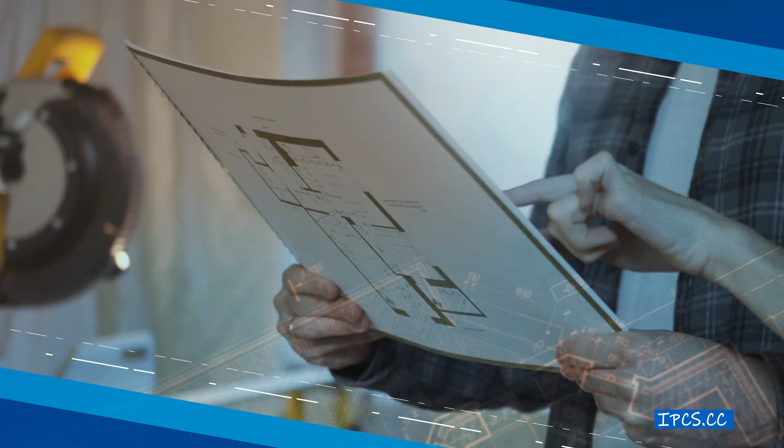We'll begin with an initial meeting here in our office or over the phone to discuss the project. During this meeting, an IPC Services representative will go over important details for your project. Are you looking for plans for a new home, an addition or alteration to your existing residence? Have you received a code citation for a change to your property? Will you need permitting assistance?

Aside from construction details, we'll also ask for your contact information, including your full name, phone number, and email address, as well as the site address and billing address.

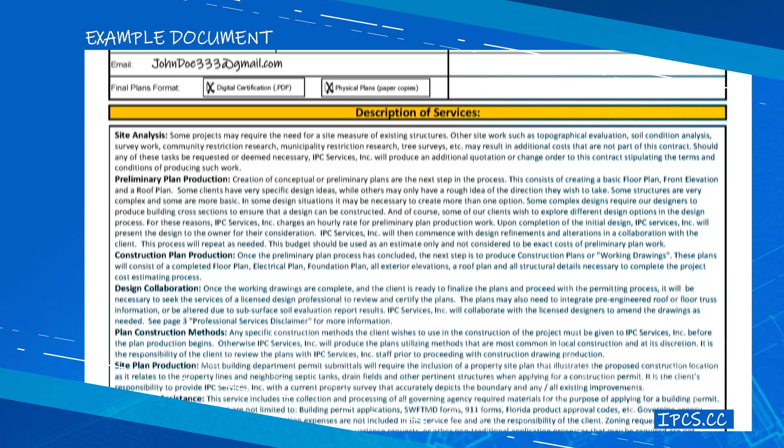After your project details are understood, your IPC representative will compose a written services agreement and send it to you for your consideration. Every services agreement we write is specifically tailored for each client and will include a budget for the work we'll perform for you.

Some of our services are billed at an hourly rate, some are fixed costs, and some are based on a per square foot basis. Many budgets are a mix of all three. The fee schedule for each of our services is outlined in your service agreement.

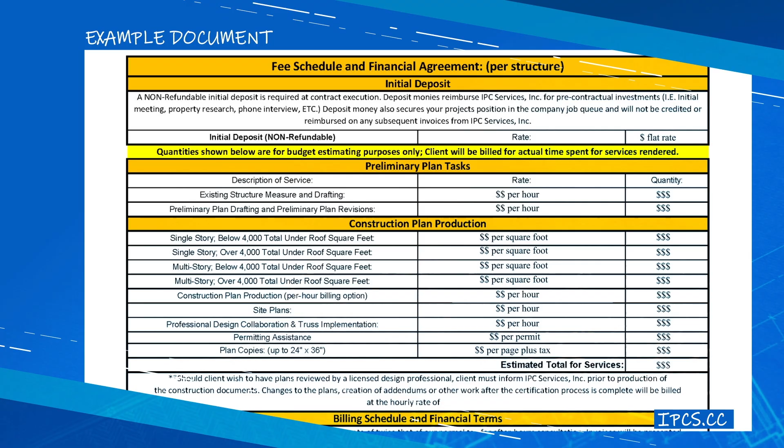While we do our very best to establish an accurate budget for each project, you should expect your invoices to be different from the budget, because they're billed based on the actual time spent completing the work and the under-roof square footage of the final design.

As a result, some projects finish under budget and some exceed their budget. Rest assured, our teams will always work diligently to complete your project under budget and communicate with you throughout the process.

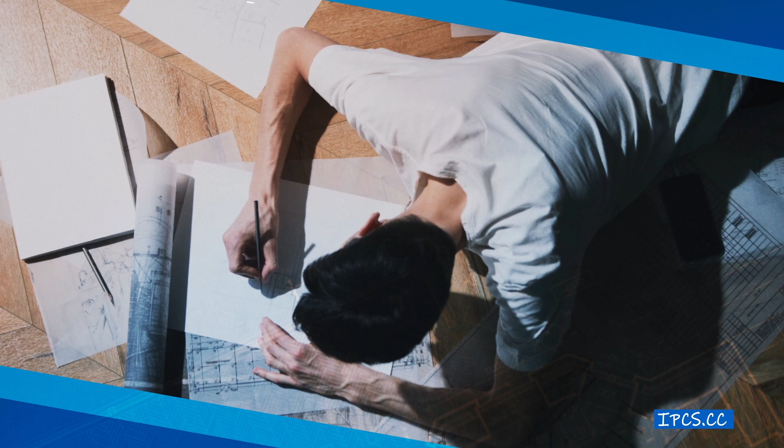When you are ready to hire us, kindly return a signed copy of the services agreement and a form of payment for the initiation deposit.

Initiation deposits are non-refundable and perform two purposes. First, they reimburse our staff for the time and energy spent on your project up to this point -- phone calls, emails, office meetings, property research, and other tasks we've completed in order to establish the scope of work we need to complete and calculate an accurate estimated budget for the project.

Secondly, the deposit secures your position in our project queue. The project queue is a list of previously sold projects that have not yet been started by our staff. As jobs are sold, each project is placed in the project queue in the order in which they were sold. Staff will be assigned project folders in that same order as they become available to start new jobs.

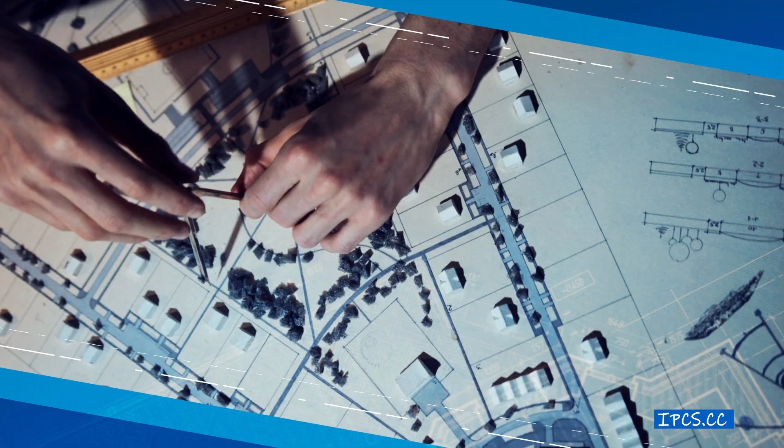Please feel free to ask your representative what the current estimated queue times are running. Their answer will always be based on when they expect your project to be assigned to staff and begun, and not when the work will be completed.

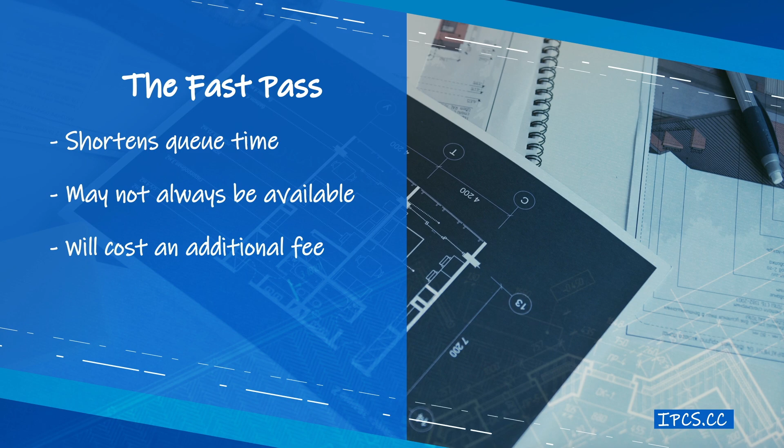On occasion, we can offer a fast pass to customers in our project queue that will shorten the expected wait time to begin their project. However, this option is not always available, so please feel free to ask your representative about a fast pass when you sign your services agreement. If it is available, additional charges will apply.

Once your project has arrived at the front of the project queue, your assigned drafter will reach out to you and introduce themselves. They will also review the project notes with you again, and if a field measure is needed, coordinate that appointment.

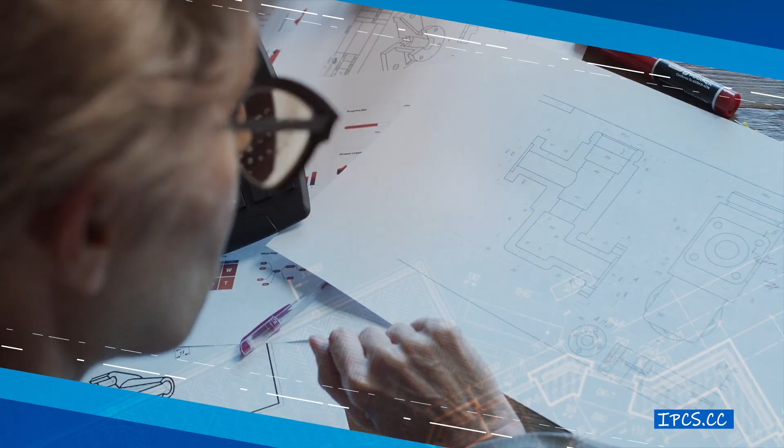IPC Services operates under a pay-as-you-go system and only creates invoices for work that has been completed. Invoices will be sent to you via email, or you can pick them up in person at our office. Our staff are not authorized to proceed with subsequent work if there are any open invoices for previous work.

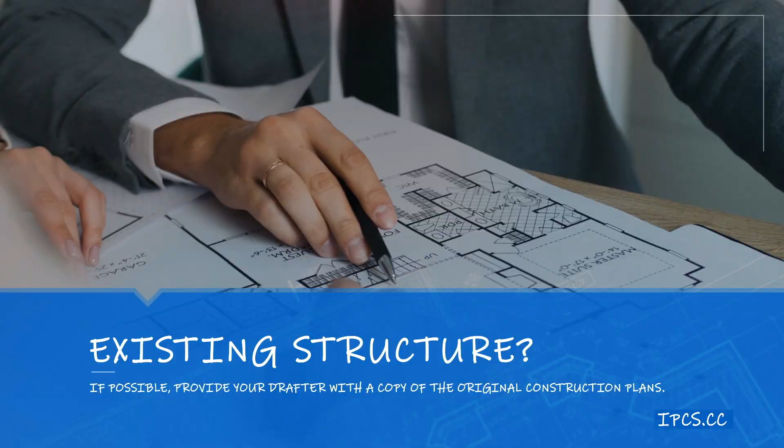If your project involves an existing structure, it is an excellent idea to provide your drafter with a copy of any original construction plans if you have them. No original plans? No problem.

Our drafters are equipped with state-of-the-art tools to measure existing structures and create as-built plans from a field measure. When performing a field measure, your drafter will utilize a 3D reality capture camera to create scans of the existing structure in combination with measuring the building with tapes and other digital equipment. It is company policy that you are present while this service is performed.

Now that your drafter has gotten more details about the project and copies of original plans or a field measure of any existing structures, they can move on to the preliminary plan phase.

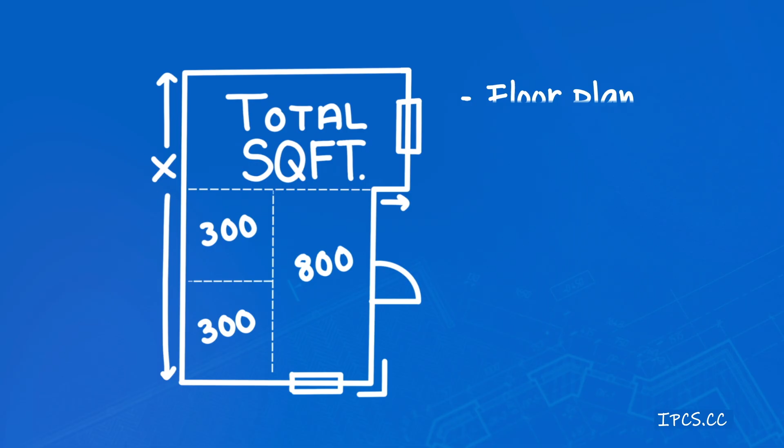Our drafters will utilize computer software to create a conceptual layout that we refer to as preliminary plan. The preliminary plan will include a floor plan, front elevation, roof plan, square footage calculations, room labels, and dimensions.

This is a great time to make any stylistic changes before the drawings move on to the more complicated phases. You'll want to review these plans thoroughly and let your drafter know of any changes you want to make during this phase.

While we're happy to explore as many design options as you'd like us to draw, it's important to be mindful that this portion of the work is billed at an hourly rate. Exploring too many options can blow your preliminary plan budget. At the same time, it's far less costly to make changes now than it is to the project after it's built.

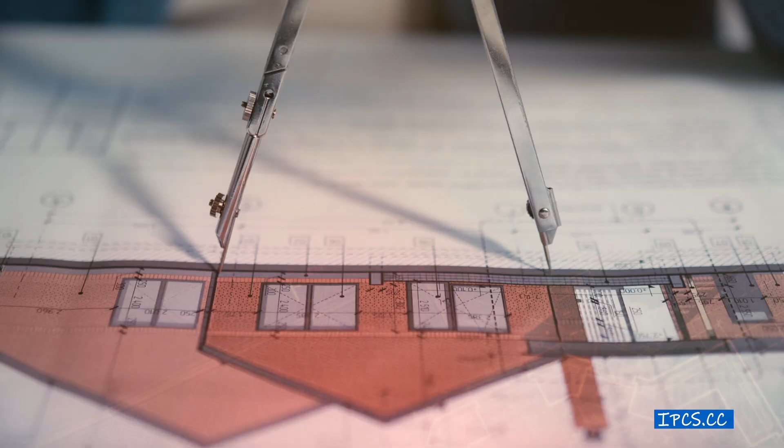IPC will invoice you at the completion of the preliminary plan and each draft as they are completed. We'll continue to modify the drawings as you wish until you are 100% satisfied and ready to move on to working drawings.

Once you approve the preliminary plans, your drafter will begin the creation of the working drawings. Working drawings are the more complicated half of construction plans. These include a foundation plan, a dimension floor plan, engineering notes, an electrical plan, all exterior elevations, and any necessary details and notes the engineer will require for the structure to be deemed compliant with the current Florida building code.

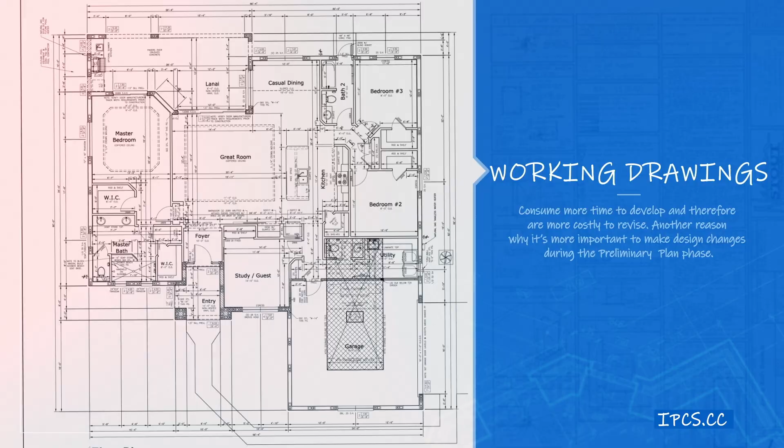Working drawings consume more time to develop and therefore are more costly to revise. Another reason why it's more important to make design changes during the preliminary plan phase.

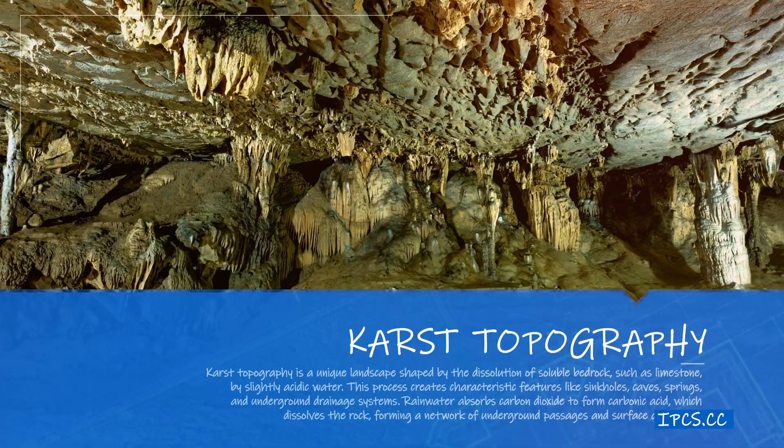Side note: although not required by the Florida Building Code, a geological subsurface soil evaluation performed by a licensed geotechnical engineering firm is a prudent investment for many property owners. Many parts of Florida have subsurface soils classified as karst topography, and as such, your site may contain an array of subsurface soils that are not ideal for building upon. Should a geotechnical evaluation discover adverse conditions at your building site, it does not mean you can't build there. It does mean, however, that special precautions should be considered to ensure a structurally sound design.

To learn more, talk with your IPC Services rep about the option of getting geological soil testing done at your property. The next step is for your drafter to create a site plan for your project.

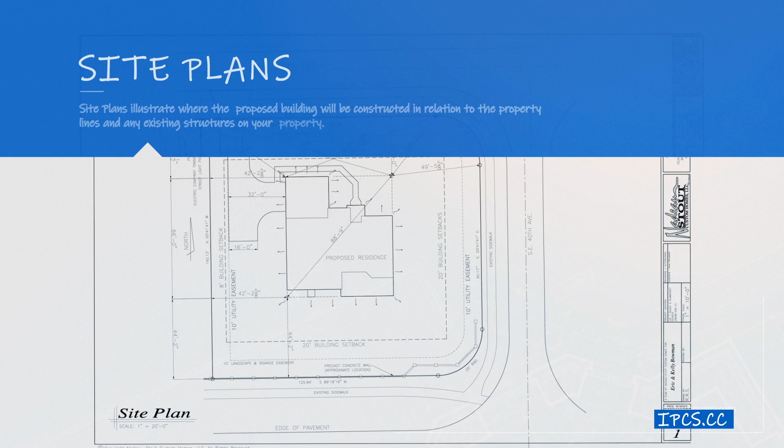Site plans illustrate where the proposed building will be constructed in relation to the property lines and any existing structures on your property. They will also show building setbacks as required by local zoning regulations, drainage and utility easements, flood zone information, driveways, wells, and septic drain fields, or water and sewer connection locations, and more.

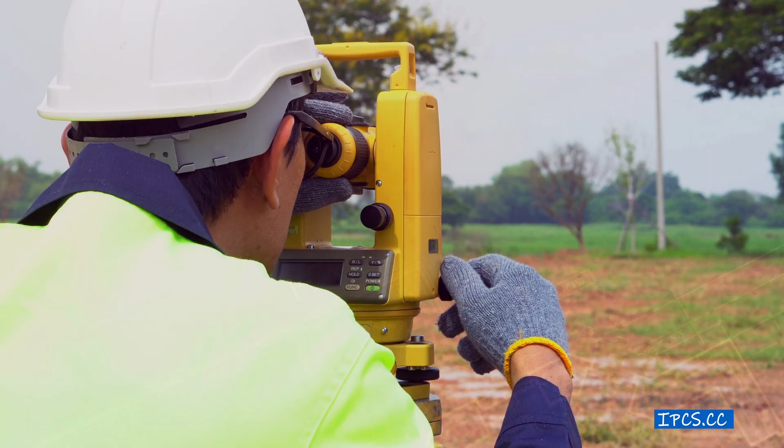The best tool your drafter can utilize to create an accurate site plan is a current property survey. If you don't have a current survey, it is recommended that you hire a professional land surveyor to measure and create an up-to-date survey. If the project is to be financed by a lender, there's a good chance they will require a current survey as well.

In the event your proposed construction is to be erected in or near a flood zone or flood-prone area, we will also need your surveyor to establish the minimum finish floor elevation above sea level for the proposed project, as well as detail the existing grade elevation where the project will be built.

Lastly, if the project is to be built near a body of water, your surveyor also needs to identify where the ordinary high water line is, as well as if the property is within an environmentally sensitive overlay zone.

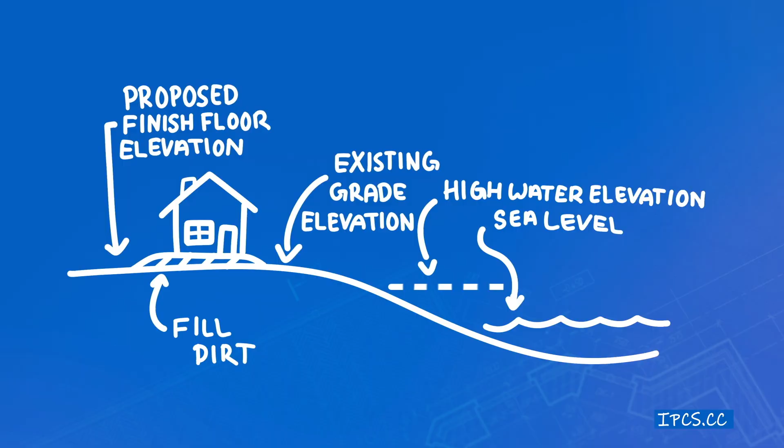As stormwater management is critical to the success of a property and neighborhood, your drafter will also evaluate the existing and proposed impervious area coverages during site plan development.

In the event too much of your property is being covered and at risk for flood problems, you may be required by the local authorities to hire a licensed civil engineer to design a stormwater management plan. Your drafter or representative will discuss this with you if it is discovered to be an issue.

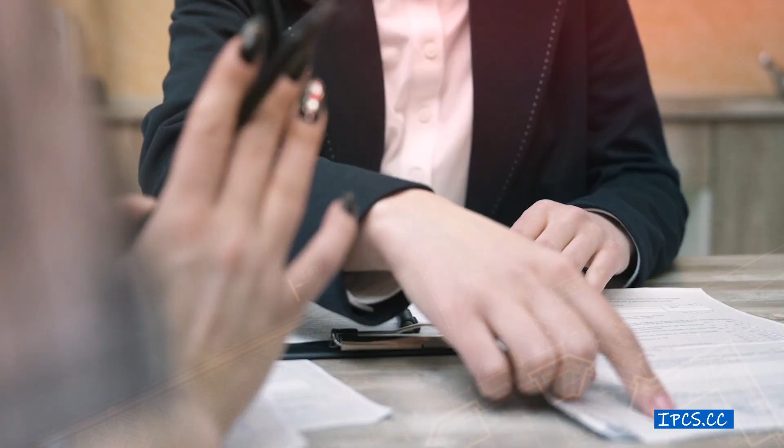At this point, the working drawings are adequate for cost estimating, and you will be invoiced for their completion as outlined in your services agreement budget.

Once the invoice has been paid, IPC will then give you a set of the working drawings for your review. Or if you prefer, we're happy to schedule an appointment here in our office to review the working drawings with you in person. As this plan will be used to construct your project, it is important to review them thoroughly.

IPC will make any edits to the plans that you deem appropriate. Once you or your builder have completed the cost estimating process and you're satisfied with the construction budget, the next step is to finalize the plans for permitting and construction.

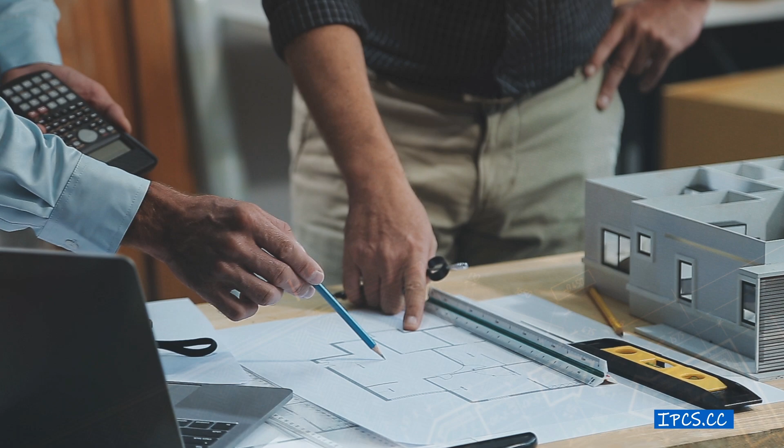Side note: as the design has been finalized, it is a good time to order the manual D&J and energy calculations that will be needed for permitting. In many cases, you or your builder's air conditioning contractor will provide these. If not, you'll need to hire an independent energy designer to prepare them. If you don't have one, ask your IPC representative for a referral.

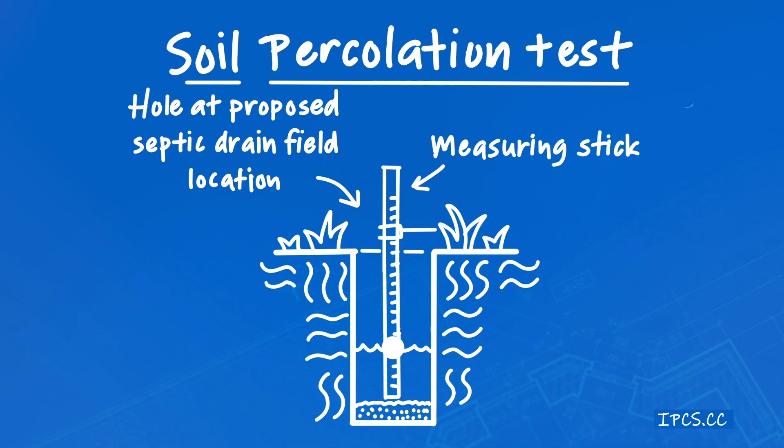Side note: if your project includes the installation of a septic tank and drain field, it's a good time to order a percolation test of the soils where the drain field will be installed. Percolation test results are needed by the Florida Department of Environmental Protection before they will issue a septic permit. While many local DEP offices can do this, it is sometimes faster to have an independent specialist perform this test and provide you with a report to use for permitting.

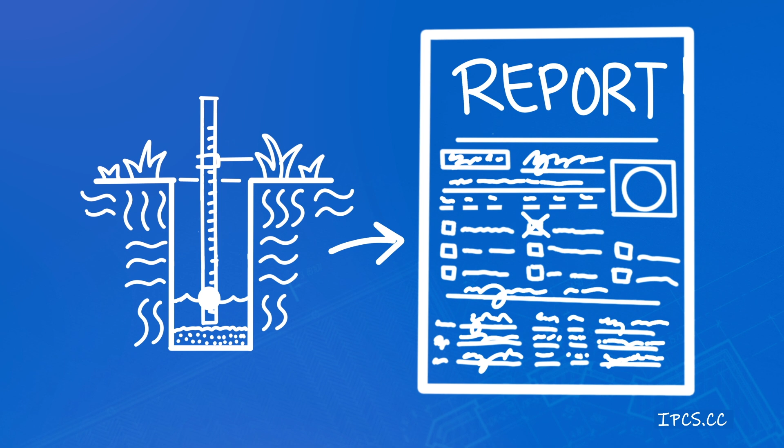Lastly, make sure to ask your IPC permitting agent if your property will fall within the criteria that requires an enhanced nitrogen-reducing septic system or not.

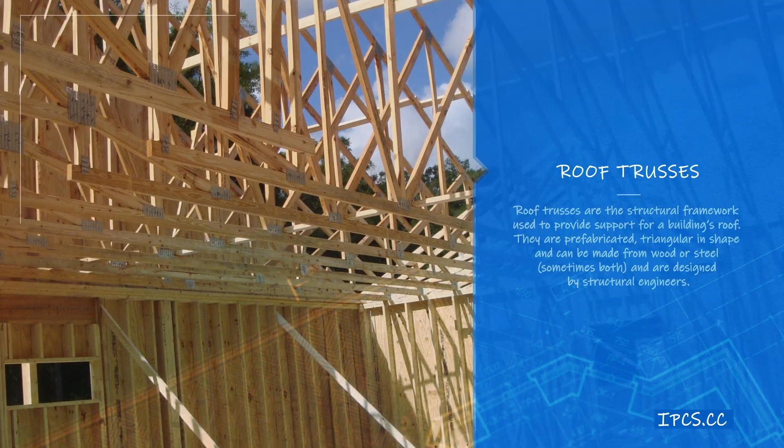Your drafter will need to acquire roof truss design information from the company you intend to buy roof trusses from. If you don't have a preference, your drafter will be happy to recommend a roof truss company to work with. The information your drafter requires from the truss company will allow them to marry the roof truss solution to the working drawings. As this information can vary from truss company to truss company, it is very important to stick with the same company throughout construction.

Utilizing a different truss company to provide roof trusses for your building other than what we accounted for could result in a serious structural failure.

Once the drafter has implemented the truss design information into your working drawings, we will send the plan to an independent structural engineer. IPC Services works regularly with several great engineering firms, but if you have one you prefer to work with, we'll be happy to send the plans to them for their review.

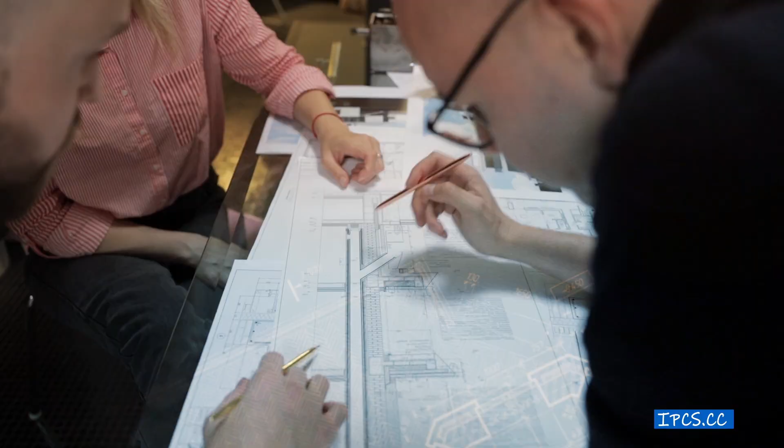It is important to note that structural engineering review and certification costs are not included in your services agreement, and as such, not paid by IPC Services. You will hire the engineering firm and pay them directly for their services.

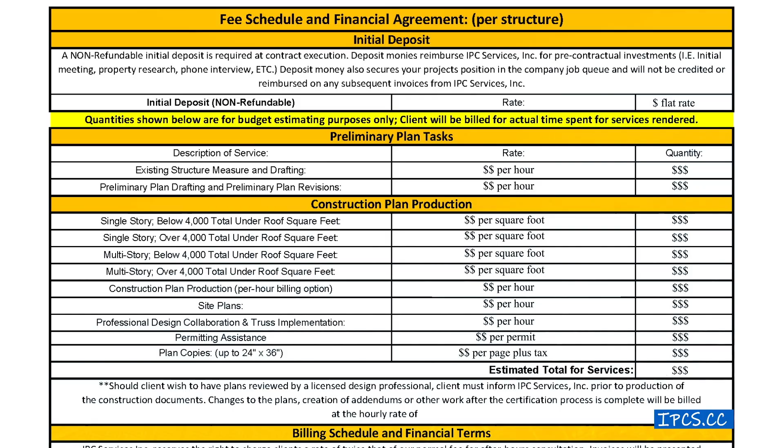After receiving payment, your engineer will review the plan set and notify your drafter of any necessary edits that are needed before they can certify the plans. Edits requested by the engineer are included in your services agreement under Professional Design Collaboration.

Make sure to tell your drafter whether you prefer the engineer to provide us with digitally certified electronic plans or old-fashioned physical sets with embossed seals. It's important to know which format your building department will accept.

Over the years, digitally certified plans have become more prevalent, but there are still a few more rural authorities that don't accept them. However, digital plans tend to be processed quicker.

After the engineer has reviewed the plans thoroughly and sees no further necessary changes, they will certify the plans and send them back to our office. We'll then send them on to you.

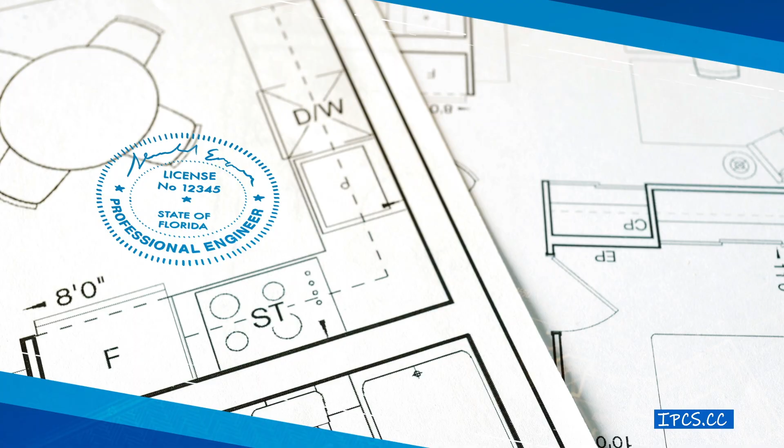Now that you have certified plans from your engineer, you're ready to move on to permitting. If you're hiring a licensed building contractor to construct your new project, they'll probably handle the permitting through their office. But if you are acting as an owner builder or are a busy contractor who needs some assistance, we're here to help. As the plans are only a small part of the building permit application submittal package, it can be a daunting and time-consuming task to navigate the challenges of preparing the permitting application for your project.

For a flat fee, our permitting agent will work with you to act as your representative to fill out the application and collect all the other items needed to apply for a construction permit. Please note, IPC's Permitting Assistance Service fee does not include any building or health department application costs, impact fees, county recording fees, nor any costs charged for the other items that are needed to make application.

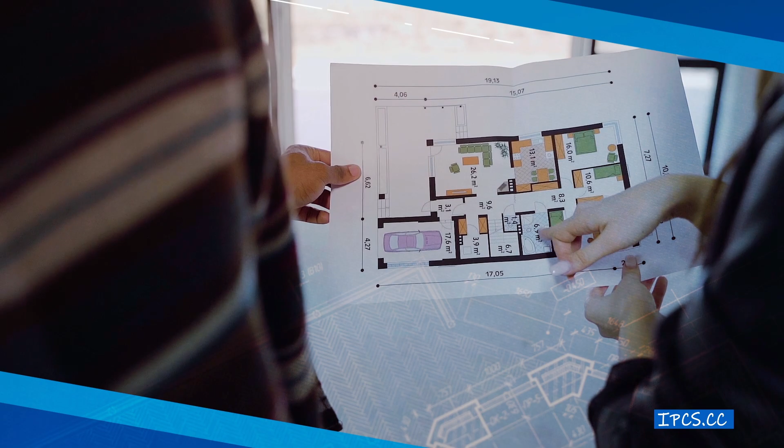As each project is unique, each permit application is unique as well. Our permitting agent will work with you to identify and establish everything that is needed for your permit. Please plan to review and discuss the project and permit with them in detail as they begin the permitting preparation process.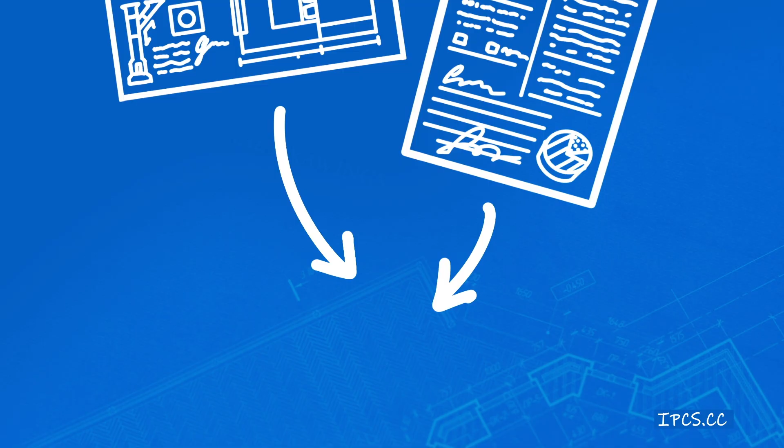Once our permitting agent has collected all the documentation they need for the application, they will submit the package to the appropriate building authority and report to you when this is done.

Most permits must make their way through numerous department reviews, and the time it takes to complete this process varies from permit to permit. Our agent will continue to monitor and communicate with the authority often. It is not uncommon for each department to return comments or inquiries for additional information that our agent will process for you. And that's everything.

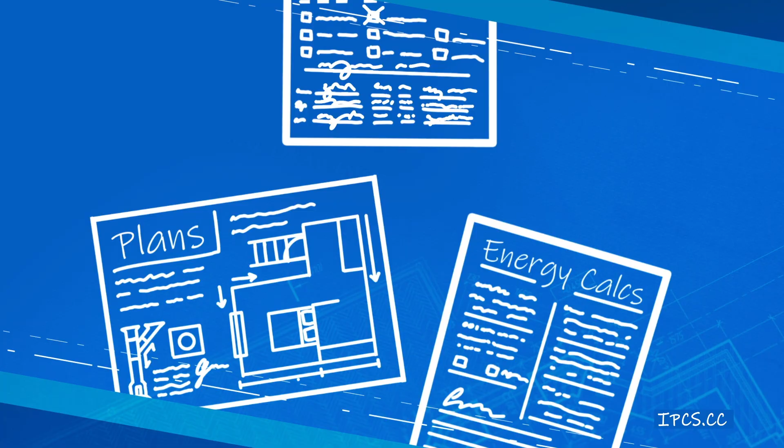Once your permit is issued and you have all of the approved documents from your local building authority, you are ready to start construction. In addition to pre-construction services, we also offer a few services that can help during your building process.

Our 3D interactive reality capture tours utilize sophisticated imagery technology to recreate an extremely accurate record of the project. Having a tour created means that you'll always be able to see exactly where pipes, wires, and framing are behind the drywall after it's installed.

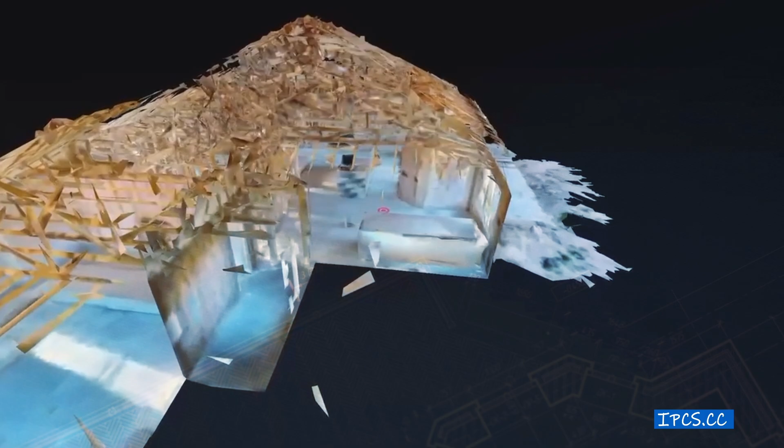But this service must be done before the drywall is hung. Ask your IPC Services rep about 3D tour creation to learn more.

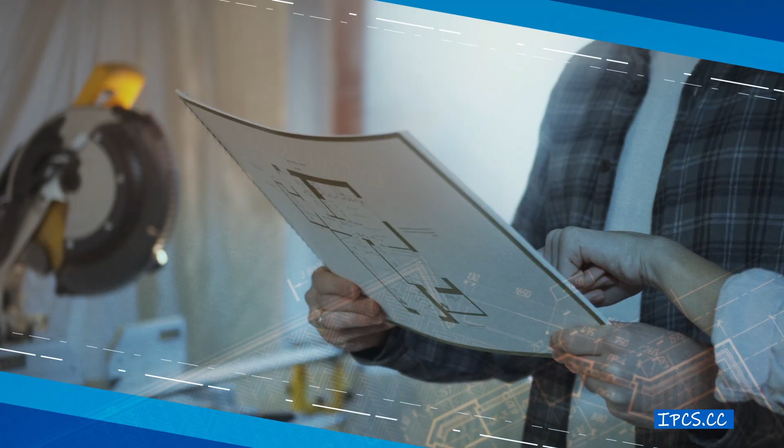Over the years, we're proud to have helped builders and developers create a product line of model homes and marketing materials to promote their brand. We're also happy to have worked with numerous independent licensed design professionals to provide drafting support services when they need some help on a single project or many.